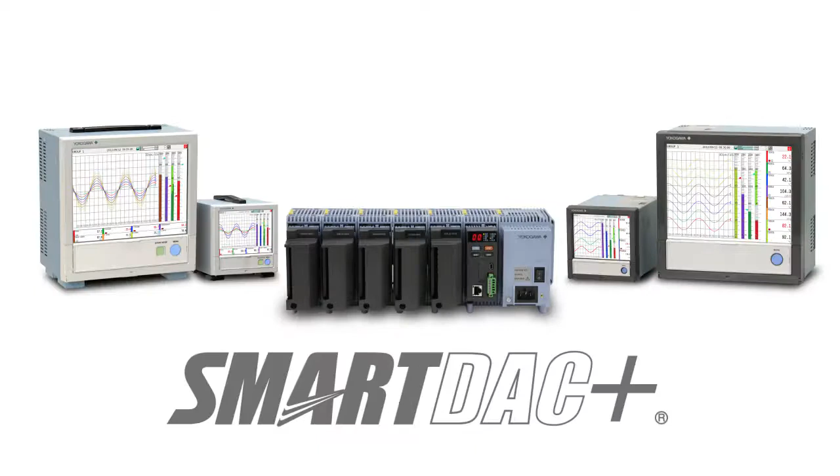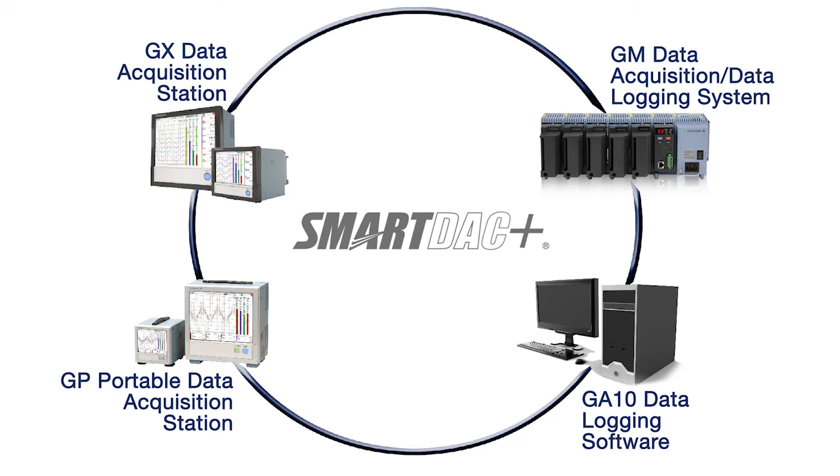Smart user interface, smart architecture, and smart functionality is achieved in the new Yokogawa SMARTDAC Plus Data Acquisition and Control product series. SMARTDAC Plus consists of the GX and GP color touchscreen data acquisition stations and the most recent addition, the GM Data Acquisition and Data Logging System, which is both compact and modular.

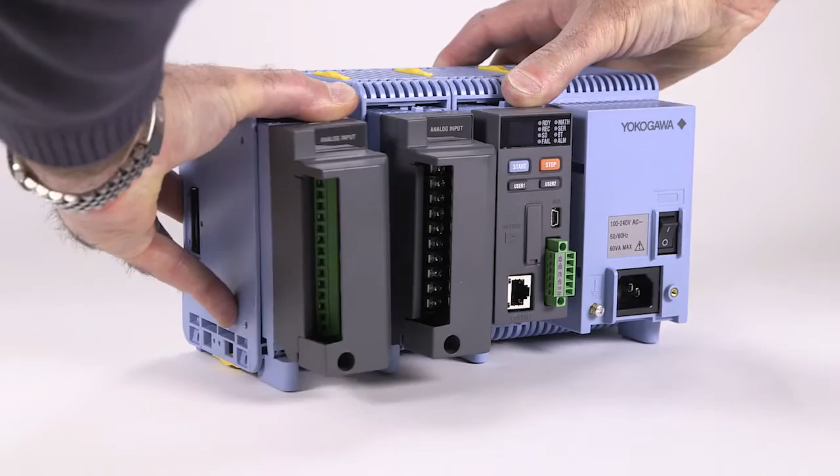Using the same modular I/O as GX and GP, the GM uses a clever side-by-side component attachment system, so it's easy to build and adapt the GM for data acquisition applications of any size. The scalable architecture of the GM system allows the user to add or remove I/O capacity quickly and easily. The GM processor and I/O modules plug into unique module base units that form a backplane and then snap together side by side to build the system.

The assembled GM system can be attached to a DIN rail, bolted to a flat panel, or can simply rest on a flat workbench or shelf. A single GM system can support up to 10 I/O modules for a capacity of up to 100 analog input channels. Up to 420 analog input channels can be supported in a multi-unit configuration.

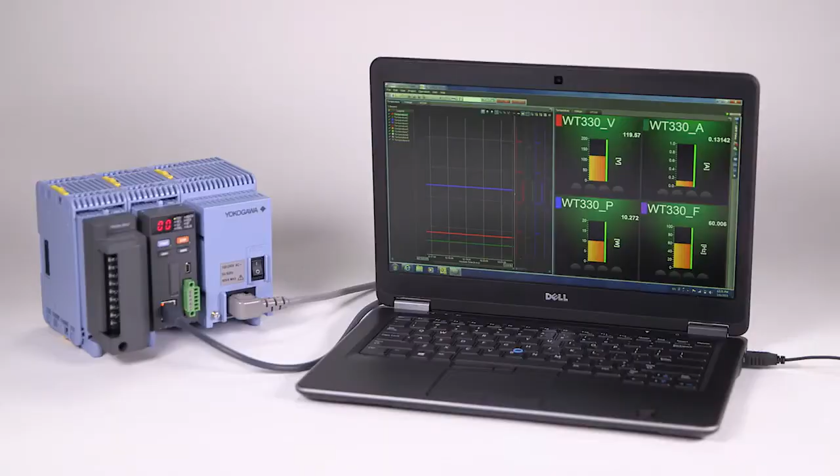An Ethernet interface is standard on GM, and a web browser is used for all configuration settings and real-time data monitoring. There's no need to purchase additional software to set up the GM or to use the built-in GM data logging functions. Optional GA10 data logging PC software can also collect data from the GM via this network connection. Another way to easily connect a PC to the GM for setup and PC data logging is to use the standard USB interface. The GA10 data logging software can also use this connection.

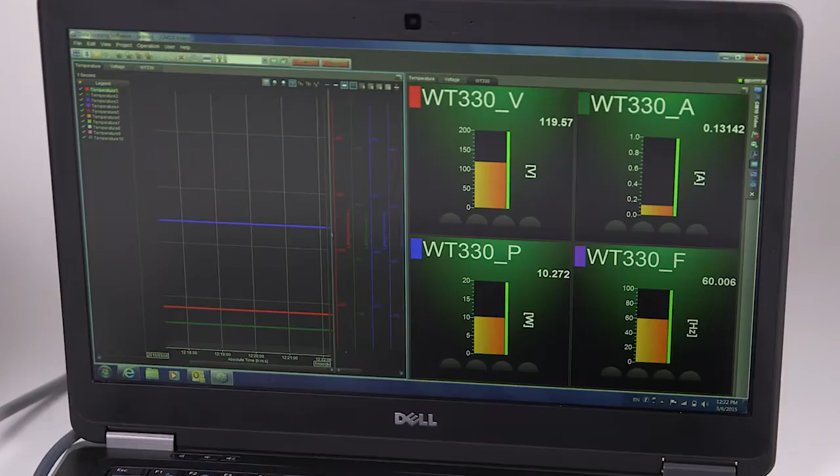The GM provides convenient real-time data monitoring, setting changes, and operating controls to smartphone and tablet users in two ways. When equipped with the optional Bluetooth interface, users can pair their device directly to the GM and use a special app that supports basic settings, operation, and real-time digital data monitoring functions. When a network connection is available, users have additional access to the GM using a mobile web browser.

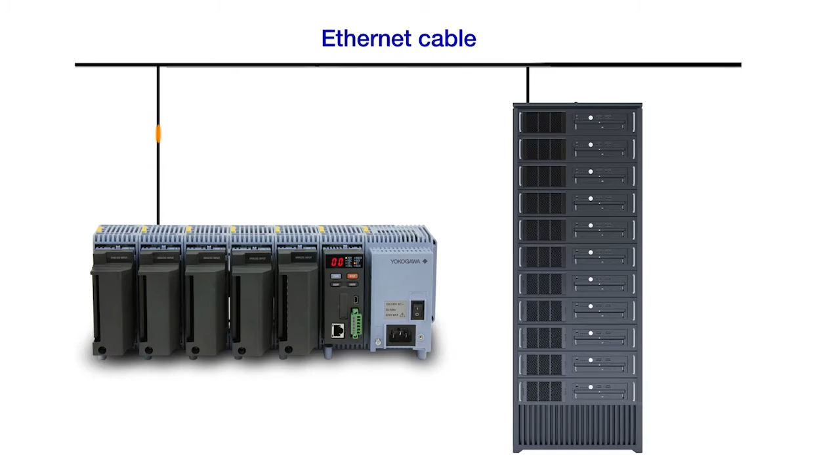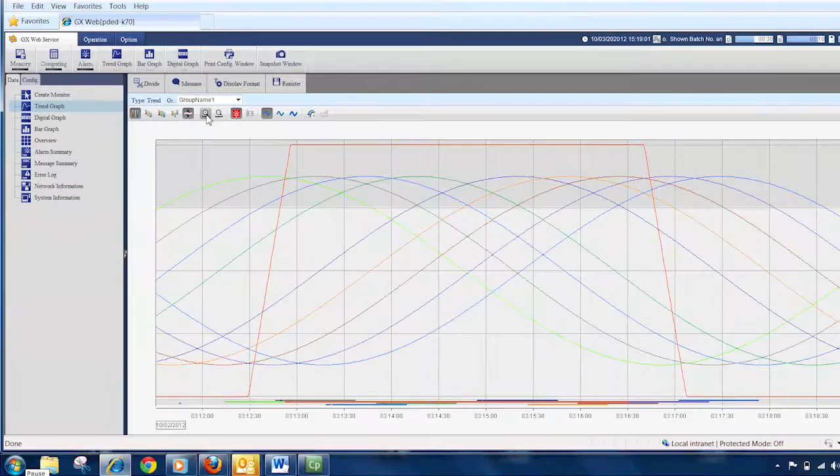The standard Ethernet interface supports a range of useful functions, including real-time data access and file transfers. Saved data files can be sent automatically to an FTP server or retrieved manually with a web browser. When the math option is specified, report PDF files can be printed directly to a network printer. Users can see real-time data with a web browser and receive email messages on alarms and other events.

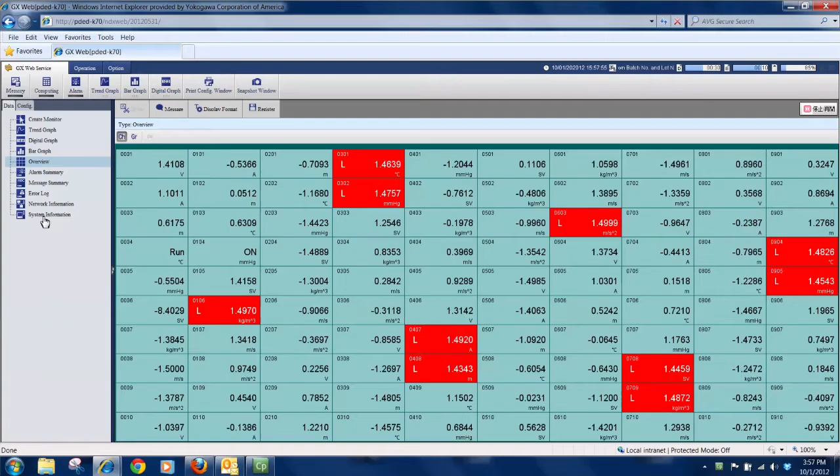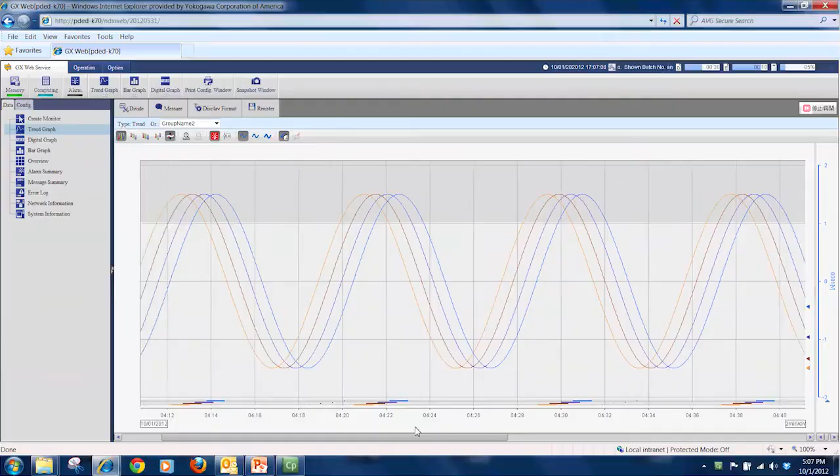In data mode, real-time data can be viewed on trend, digital, bar graph, and overview displays, plus alarm and message summary and system information screens. Users can build and save up to 15 favorite monitor screens using combinations of the standard display modes and groups. A limited amount of historical trend data can even be viewed via the browser. In configuration mode, all setting functions can be edited with the web browser, and the settings can be copied and pasted to and from an Excel spreadsheet for convenient editing.

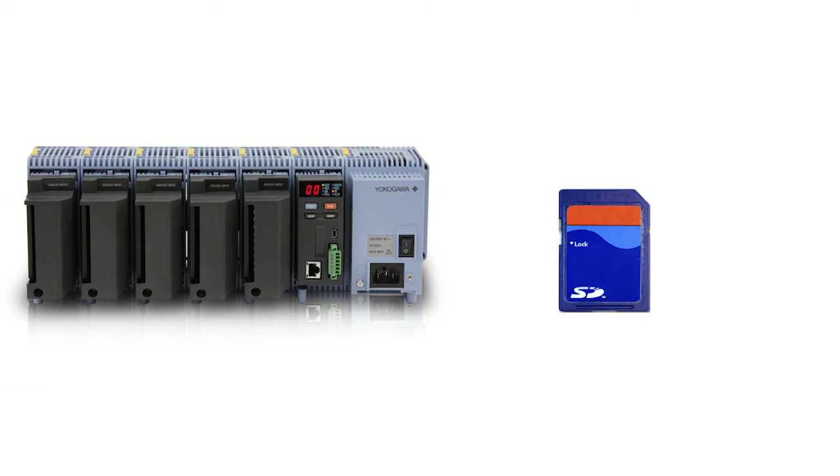In record mode, real-time data is saved to a file in secure non-volatile flash memory using a proprietary binary file format. When recording is stopped, this file is copied to the SD memory card, which becomes the permanent archive and the method of transport to the PC environment. The binary files are recognized and accessible only to the GM Universal Viewer software, which authenticates the file and alerts the user if it's been damaged or modified.

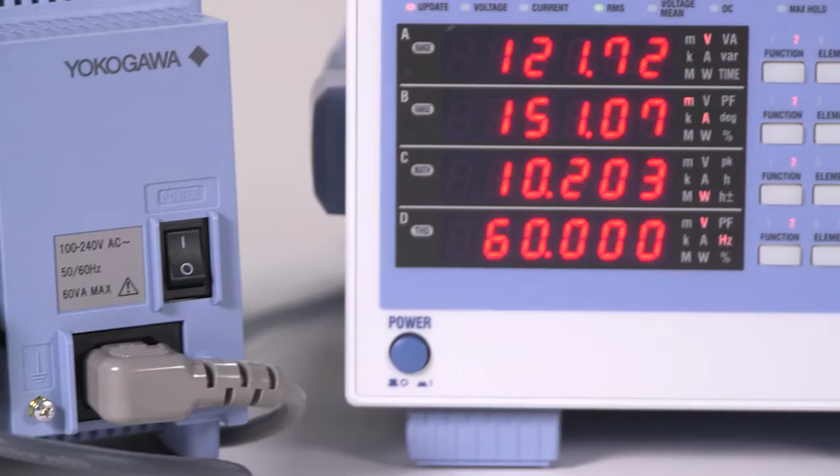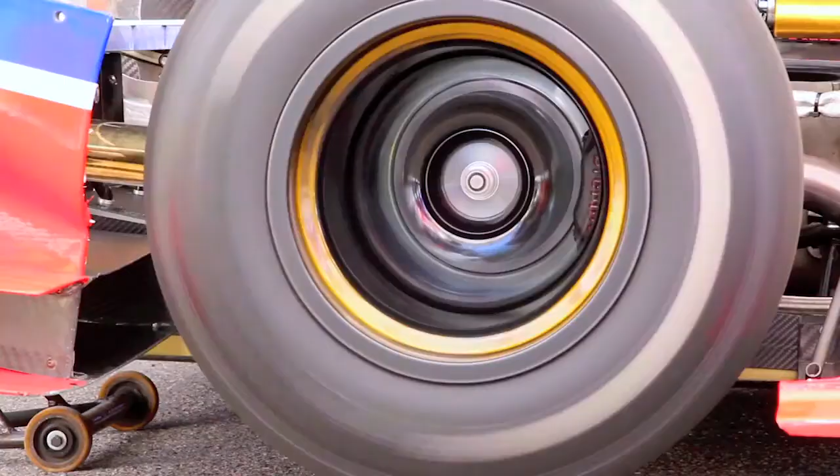Using an Ethernet connection, the GM can read power data directly from a Yokogawa WT300, 500, or 1800 series power analyzer and consolidate it into test reports with temperature and other data measured by the GM. If you need to measure power quality in appliance, motor, and other equipment test applications, you can use the full range of GM capabilities to access and generate reports with this data.

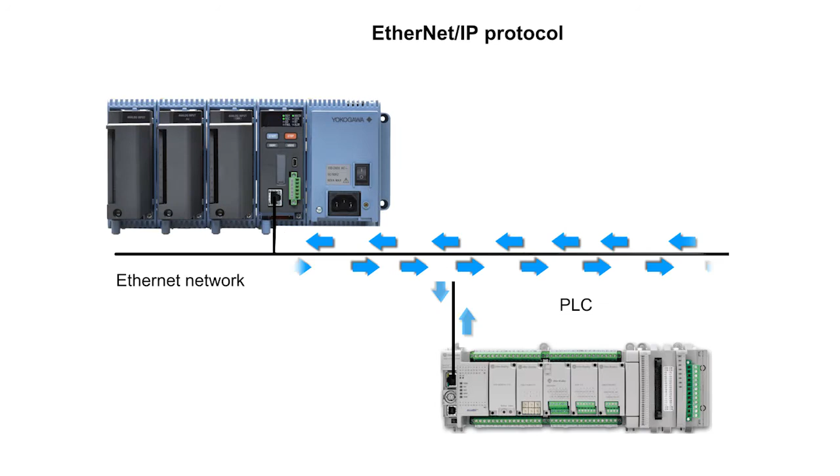Other products such as controllers, PLCs, and power meters can exchange data directly with GM via Modbus TCP client and server protocol. EtherNet/IP protocol is also available for PLC connectivity. The Yokogawa GM Data Acquisition and Data Logging System delivers industry-leading reliability, flexibility, and measurement accuracy.